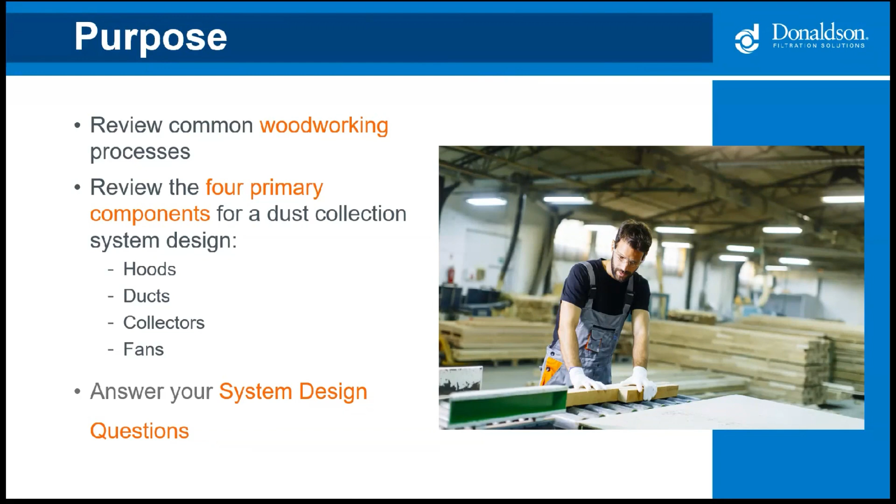We're going to start off today's webinar by reviewing some common woodworking processes where dust collection is usually needed. Then we'll get into the four primary components of dust system design: hoods, ducts, collectors, and fans. We'll finish up at the end with the Q&A session. Please note it can take years of education and experience to become an expert in dust collection system design. The goal of this session is just to give you an overview of the basics.

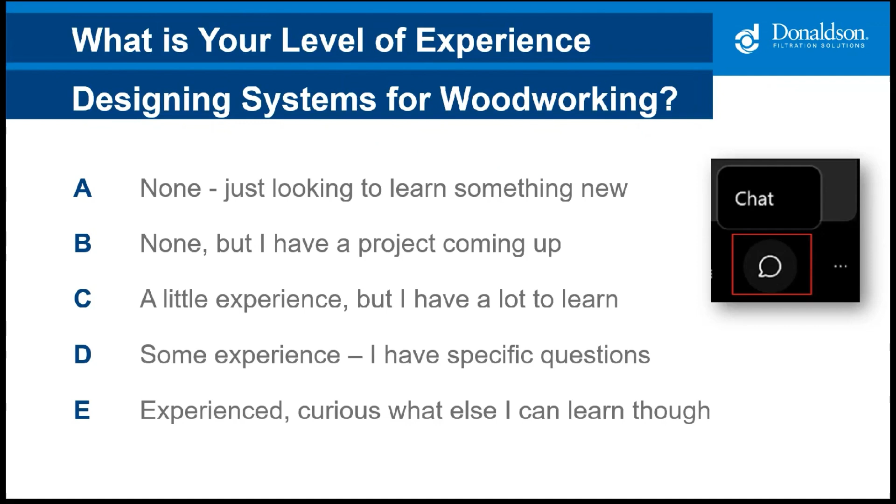Let's talk a little bit about the dust generated during woodworking applications and the processes that create them. There are a lot of important reasons to control dust generated in woodworking, such as improving the overall air quality for the employees, and exposure control. We want to minimize any dust in the breathing zones of the operators and other employees in the area. Hood design can play a big role here.

There are environmental concerns, which frequently fall under EPA standards. Safety concerns, such as NFPA guidelines, and cleanliness of the facility. In some of our larger applications, we have operations that remove over a tractor trailer full of dust in a day. So you can imagine what that would look like if we just let it pile up. And lastly, there is machine functionality and performance to consider.

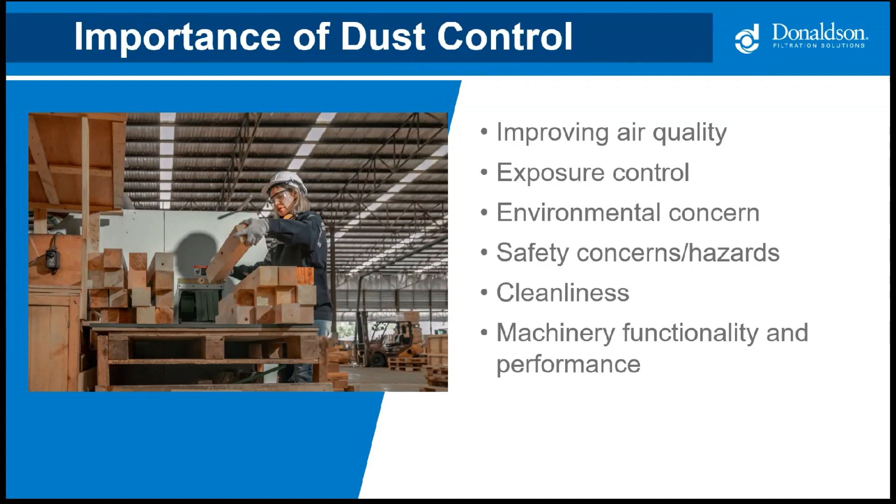There are many different types of woodworking industries, and we typically break these down into two main categories: raw materials and finished products. Raw materials include dimensional lumber and rough mill, engineered wood products such as OSB, plywood, MDF, and so forth, and rough sawmills. Whereas finished products are going to include kitchen cabinets, furniture, millwork, and other finished products.

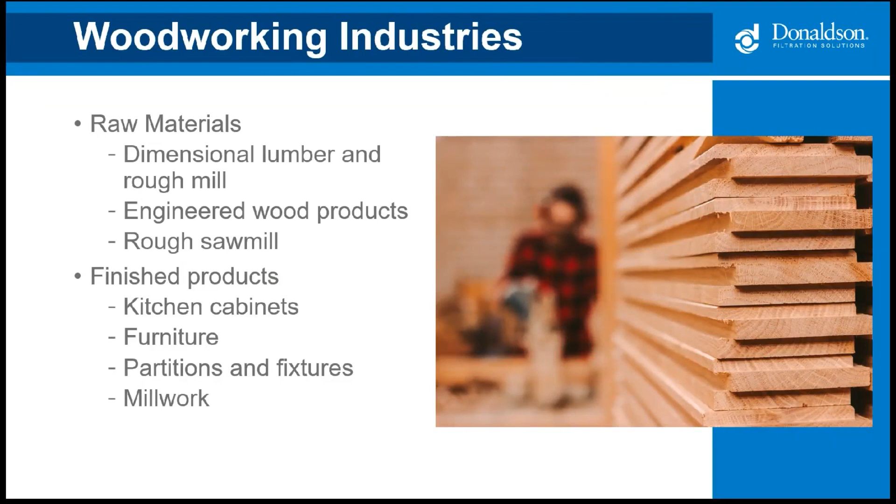The type of raw material is another important consideration in selection and sizing of dust collectors. We break these down into three primary groups: softwoods, hardwoods, and engineered lumber. Softwoods typically have a much higher moisture content, and frequently when working with pine, we would move to a polypropylene bag as an example of something we might do to compensate for the higher moisture.

Hardwoods are used more in finished products like furniture and cabinets, but different species of hardwoods can produce very different dust characteristics, even coming off the same operation. And then there's engineered lumber, which is often used in construction.

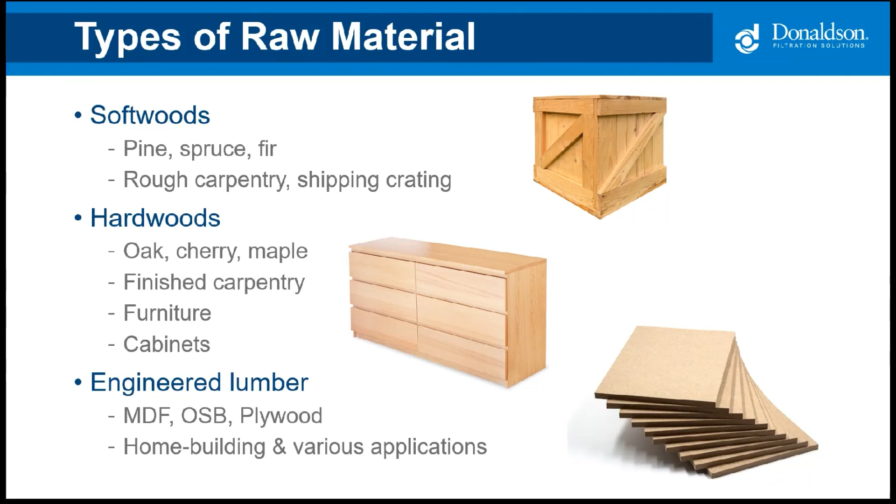All right, the diagram shown here shows several different dust collectors in use. We have our large baghouses shown at the center of the map near the bottom, as well as one outside, near the outside wall in the shop. We see a small cyclone in the upper left corner of the building, and we see an example of an enclosureless collector toward the right-hand side of the map.

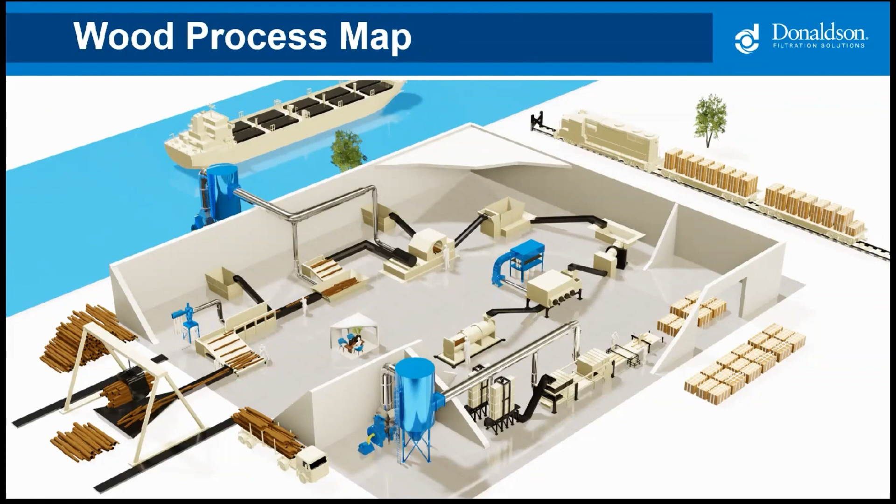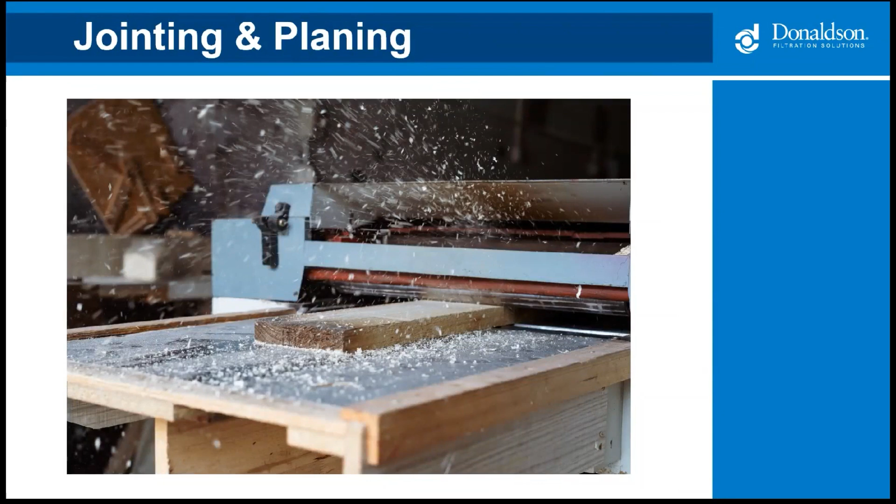Now we'll take a look at some common woodworking processes that utilize dust collection. Jointing is a flattening of one face and one edge as part of a milling process. Planing is used to smooth and remove excess material from wooden surfaces to create a near finished surface. Both of these processes can produce a large volume of dust and much larger particulate.

Most people are quite familiar with sawing and cutting. Now there's many different types of saws. You have circular saws, band saws, table saws, miter saws, and so forth down the line. And many of these saws are hooded in quite different ways.

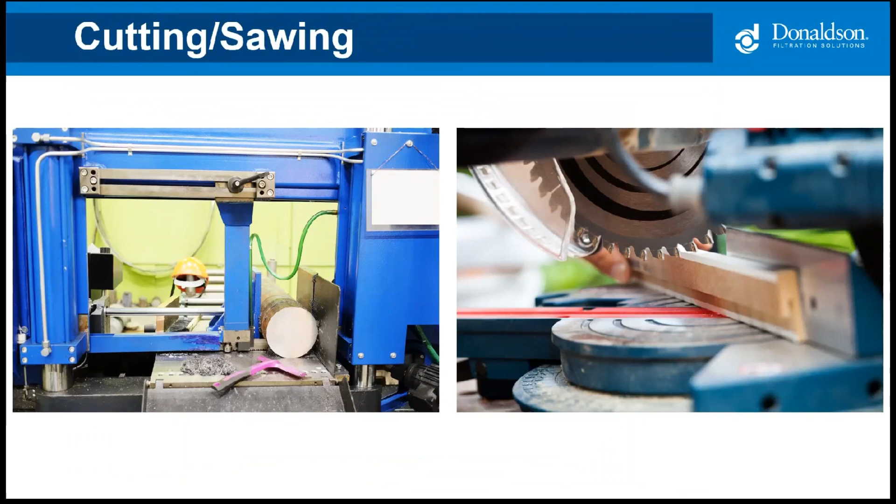Drilling and boring. Drilling is obviously creating a hole in the wood, whereas boring is removing material around a pre-existing hole. Both of these can be challenging for dust collection due to the depth of the hole being produced and the difficulty in getting the suction to the point where it is needed.

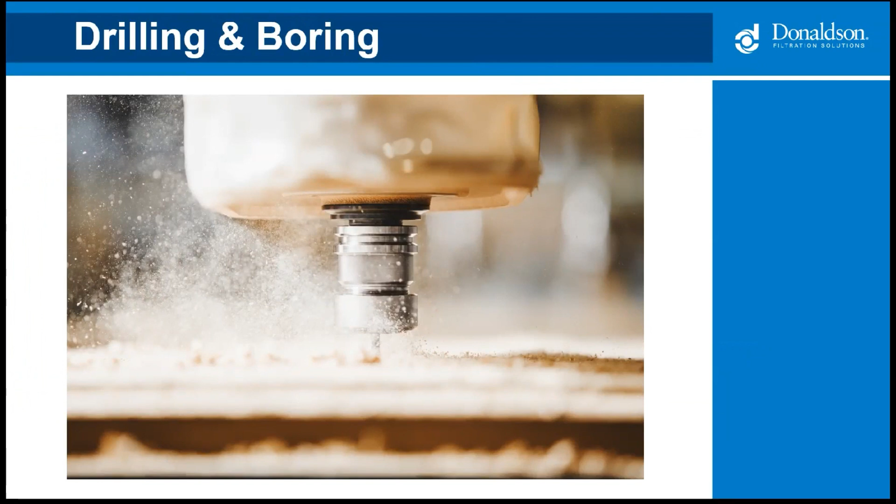Routing, shaping, and molding all involve putting a profile onto a wood component. They can be complicated and automated, or simple like a hand router you might use in your home wood shop. Many of the CNC routers require you to overcome a large amount of static pressure.

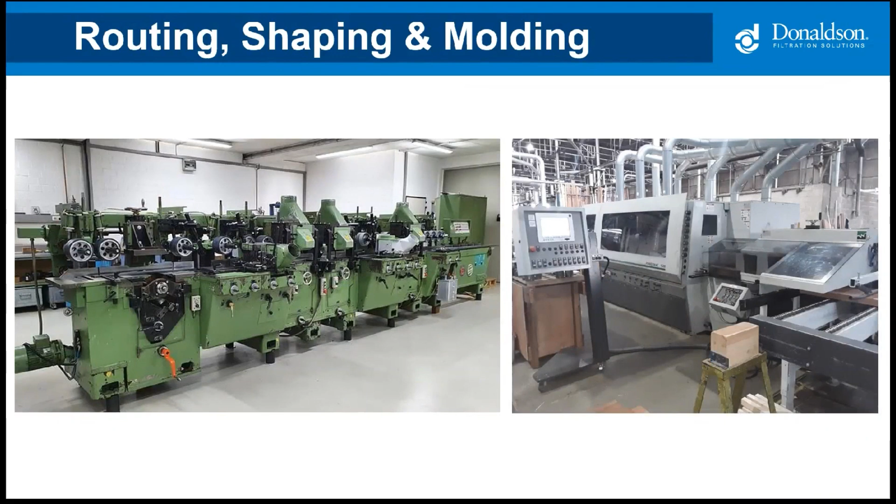Lathe turning is the art of shaping wood into cylindrical shapes, such as chair legs and spindles. One of the fun ones we did involving dust collection on a lathe is at Louisville Slugger, where bats are turned on a lathe. An interesting side note regarding Louisville Slugger is that the bats used to be nearly 100% ash, and they are now mostly all maple. This change in species had an impact on the dust collection system. You get far more curls and strands with the maple than you did with the ash.

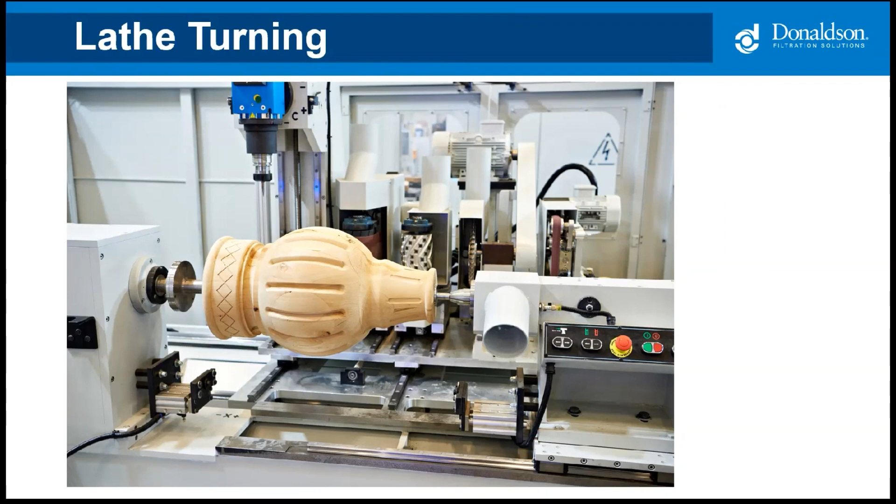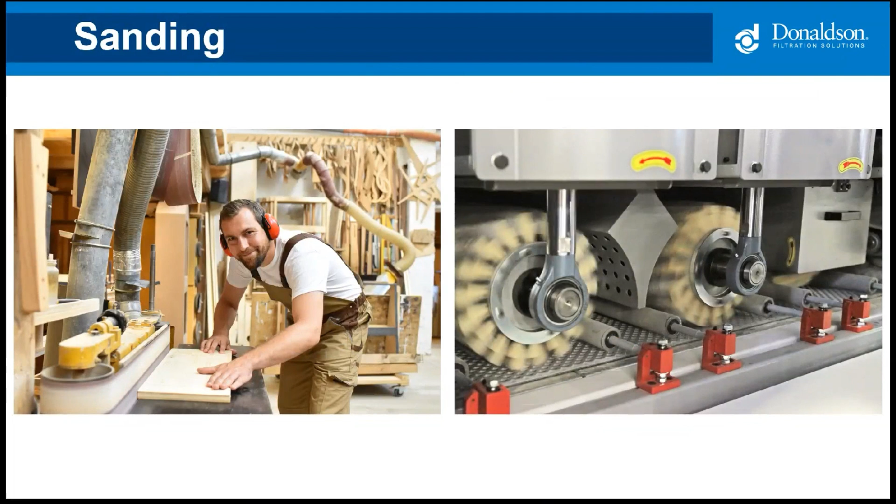Sanding is a process of taking away material to create an ultimate finished component and then adding finishes like stains or paints. The right-hand picture shows a multi-edge sander. The left-hand picture shows a belt sander. It also shows really poor ductwork. A Donaldson designed system would look a lot different, but this is representative of what many shops look like when we first entered them.

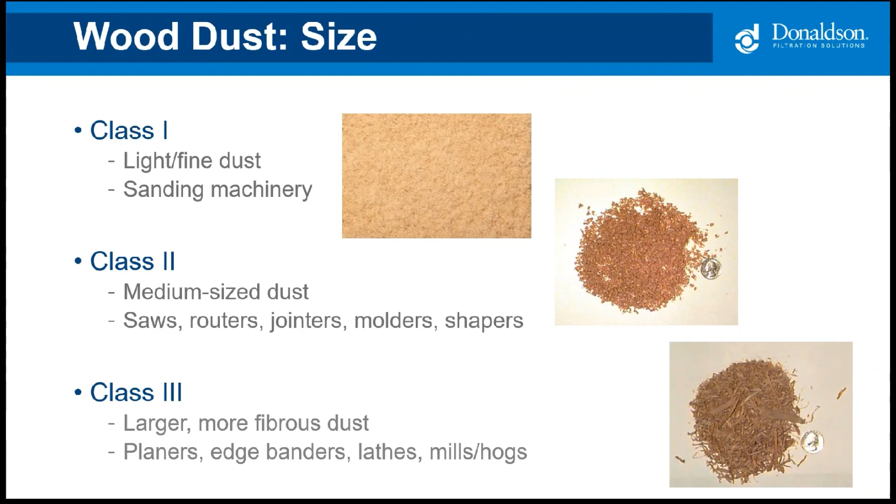As you can see in woodworking, there are many processes and machines that create dust. At Donaldson, we break the dust down into three basic categories based on the dust characteristics. These categories will help in our selection and size and style of filtration device. We define Class 1 as light or fine dust, such as dust generated from sanding. Class 2 is a medium size, such as dust generated from saws, routers, and jointers. And Class 3 would be your larger size dust, such as that generated from planers and lathes.

In addition to the size of the dust generated, there are a few other factors that we take into consideration to help select and size a dust collection system. We already spoke briefly about the different wood species and types. Moisture content can be a very important consideration. Are there glues and resins present that can create a challenge? What type of equipment or process is producing the dust? What are the airflow and static requirements of the machine?

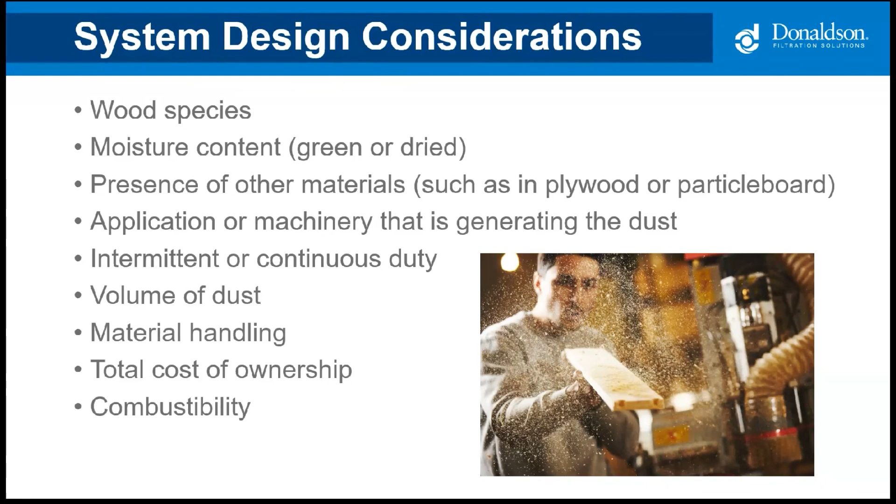Is the process continuous or intermittent? How much dust will we be collecting? A 5-gallon pail or a full tractor trailer? What are we going to do with the collected dust? Will we drop it directly into a drum or bag, or will we convey it to a storage hopper? We want to look at the total cost of ownership, and last but certainly not least, we want to consider combustibility.

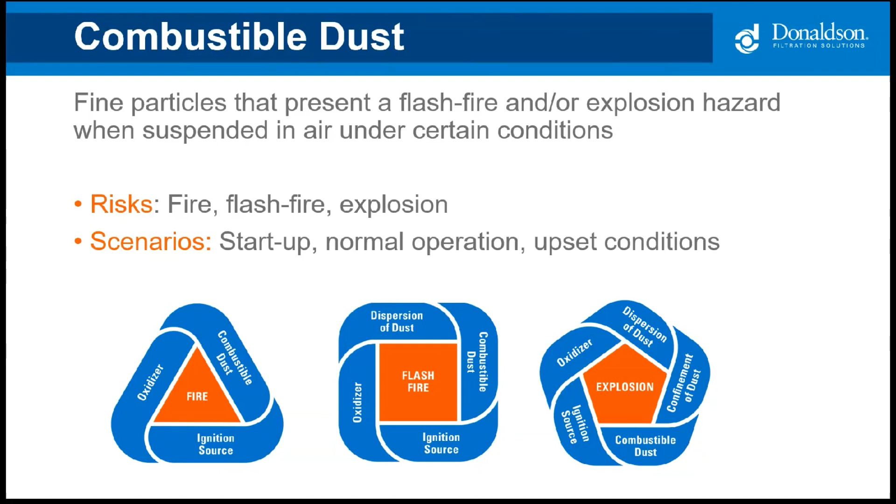When the source of fuel, which in our case is the dust we're collecting, is finely dispersed, it can lead to flash fires. When that dust is then contained within a dust collector enclosure, the conditions are right for a dust explosion. We are going to circle back to this towards the end of the session, but it's a complex and complicated topic. Toby, do you want to start talking about system design?

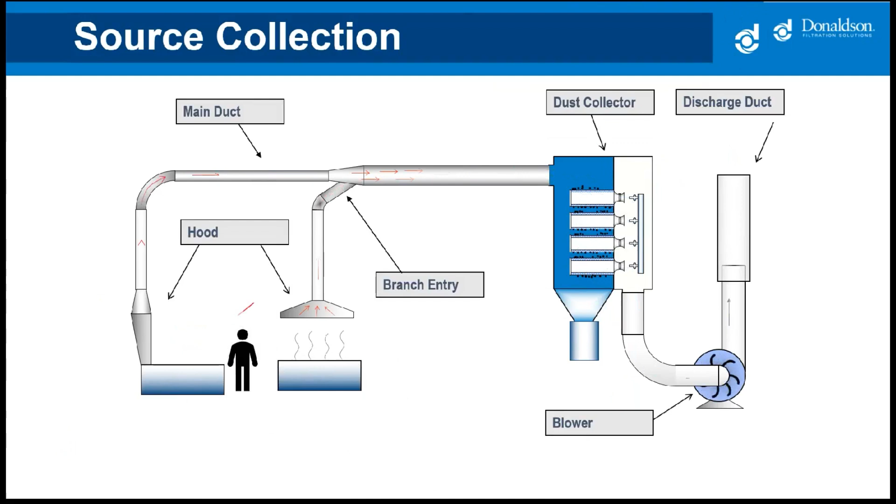Here the contaminant is separated out as clean air passes through the filter media to the fan where it's discharged to the atmosphere. These systems are a sum of individual parts that are designed based on the characteristics of the dust and various application factors. If one component's poorly designed, the whole system's affected.

In system design, we have two main objectives. We want to accurately predict the volume of air in CFM that's required to effectively capture and control contaminants at their point of generation. We also want to predict the total energy and horsepower required to produce those required airflows.

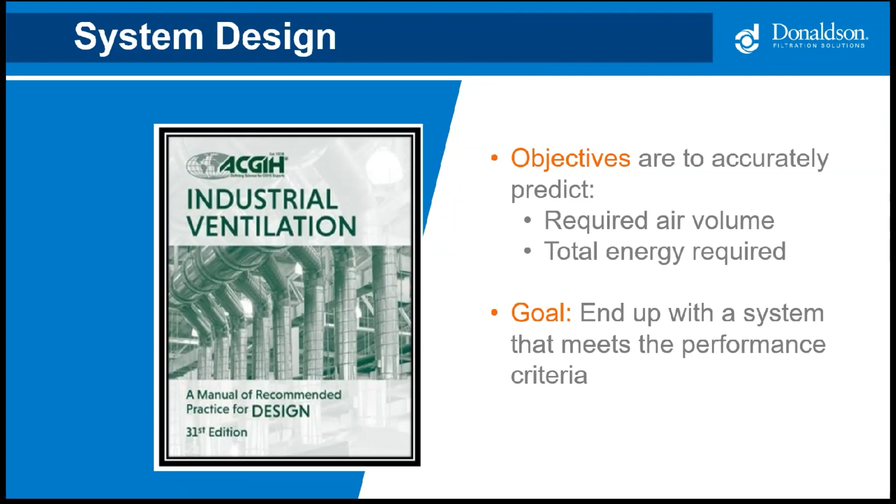They offer multiple courses throughout the year on system design using the VENT guide as a textbook. I've been to the ventilation conference and attended several courses to develop my design expertise. And we also have a few experts here at Donaldson that are instructors at the conference. If you have any interest in developing your system design knowledge, I would highly recommend both of these resources. The ACGIH guidelines are considered by most in the industry, including OSHA, as the standard for proper ventilation design.

There are a lot of different formulas that we use in designing the system. The most basic and widely applied is airflow. We refer to it as Q equals V times A. The Q is the total CFM of air needed. In order to get the Q, we multiply the velocity of air, which is the V, by the area of the hood or the duct that the air is flowing through.

The formula is one of the basic building blocks in designing dust collection systems. We start with the pickup points and calculate using the formula to get the required airflow at each pickup. This will give us the total CFM needed for the system. This formula is also used when we're calculating the required velocity within the duct. So throughout the design of the system, we'll refer to Q equals V times A over and over.

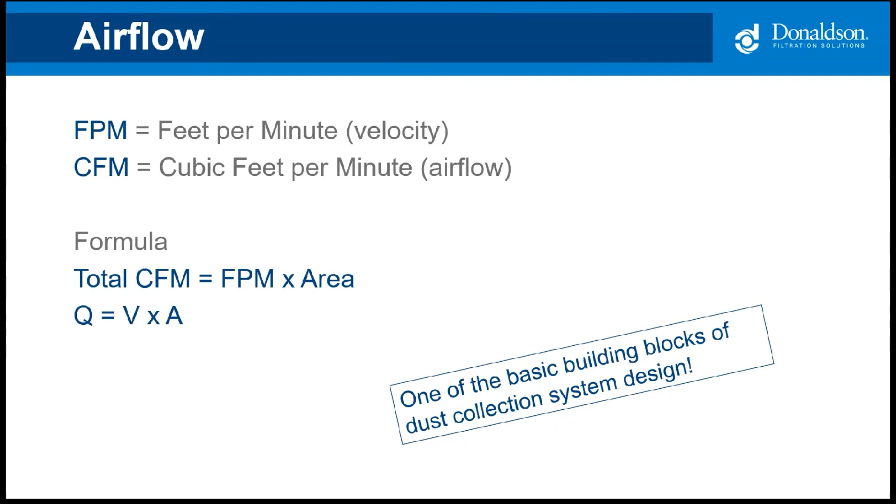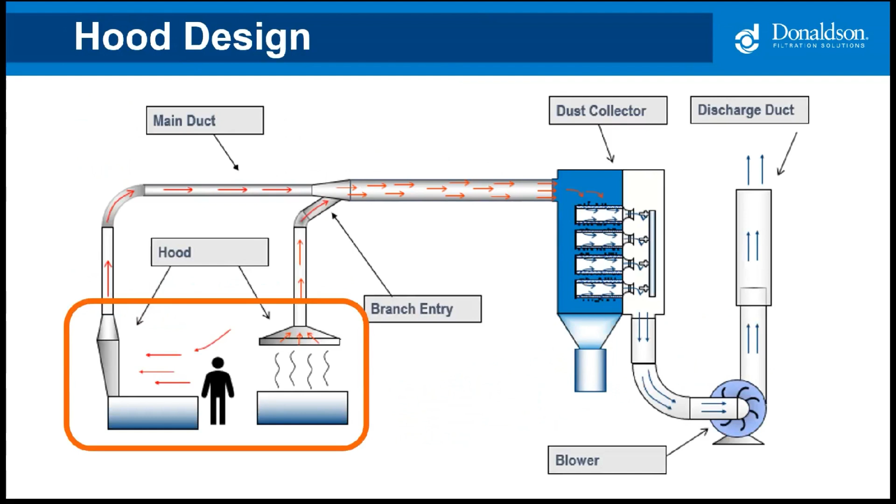The first component that we'll talk about is the hood. This is a critical component for system design that will allow the containment and collection of the dust. A well-designed hood is going to minimize the amount of airflow that's required to effectively capture and control the contaminant where it's released, while minimizing the energy required to do that.

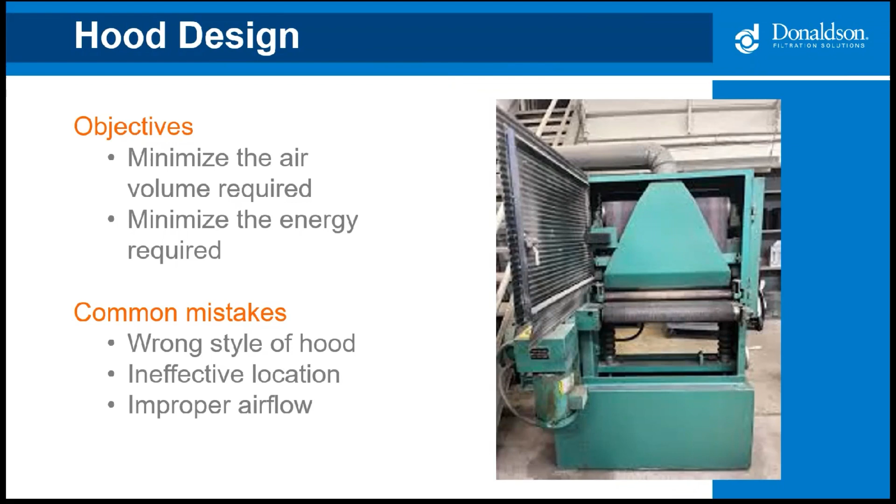When it comes to assessing existing systems, a few common mistakes we see are the wrong hood style being used, the hood's not located in an effective position, or you have inadequate airflow at the hood. You can see in this picture, the manufacturer provided a hood the full length of the sanding belt, which is great. However, the 90-degree elbow immediately above the hood that you can see in the photo is not ideal.

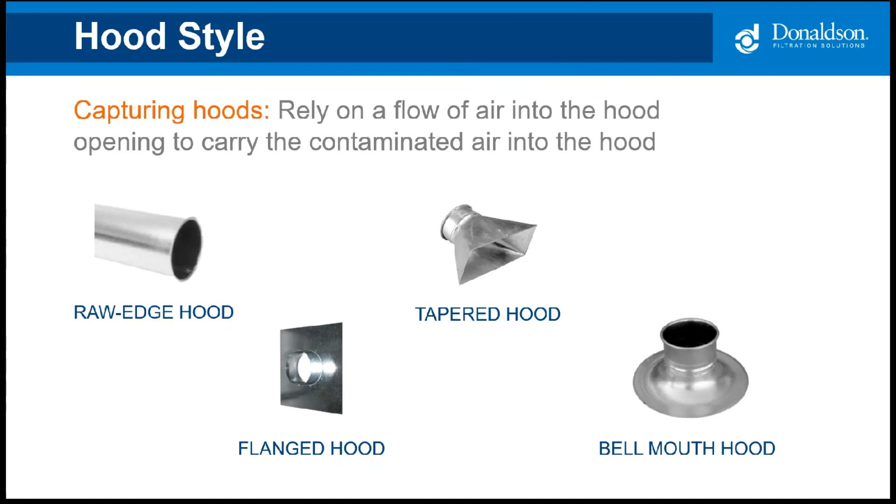So regardless of the hood style, to be an effective hood, it must be positioned properly relative to the point where the contaminant is emitted. Remember, the first objective in hood design is to minimize the air volume required to maintain capture efficiency. To minimize air volume, the hood must be close to the capture point without disrupting the process. Hoods simply just can't reach out and control contaminants far from the inlet.

So think about your vacuum at home. To pick up debris from the floor, the vacuum head must be close to the contaminant or it just doesn't have any effect. The hood positioned twice the distance from a contaminant emission point rather than at the capture point will need to draw approximately 4 times more air to produce the same capture efficiency. So more air means larger equipment, larger ducts, a larger fan with higher horsepower, all of which add increased capital and operational costs.

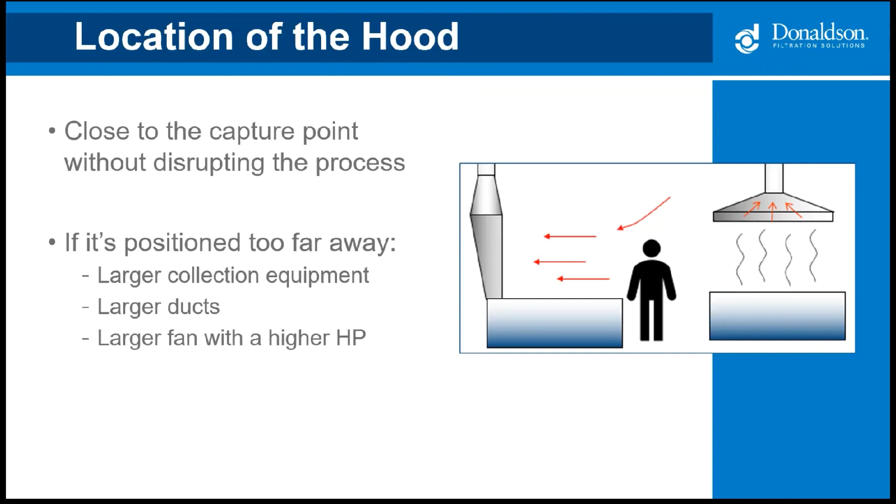When determining airflow at the hood, the main design factor is called capture velocity, the velocity required at the point where contaminant is generated to gain control of the contaminant and direct it into the hood. For wood dust, capture velocity is typically between 150 to 750 feet per minute, or FPM as we refer to it, although it's going to depend on the application and the style of the hood that you're going to use. So when you're designing hoods, we want to avoid airflow extremes.

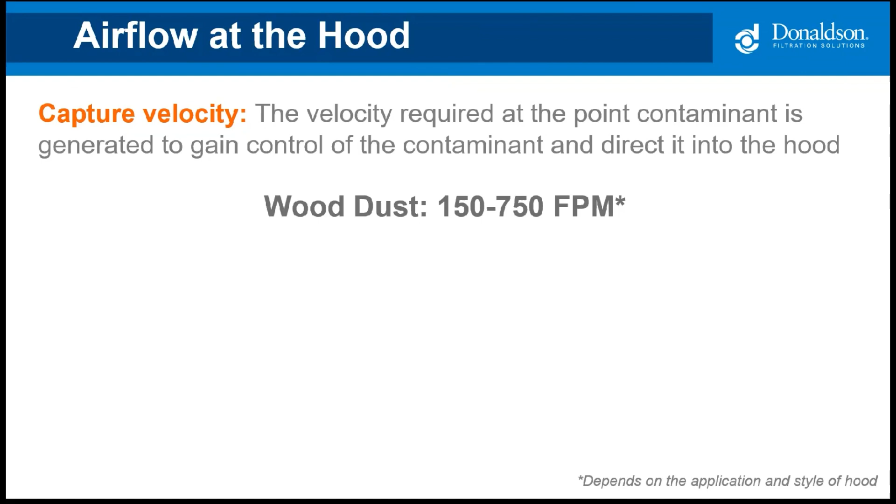Too much airflow at the hood or pickup point may mean you're picking up good product rather than just nuisance dust. It also can increase your risk of capturing unwanted particulate like sparks or embers. And since more energy is required to move more airflow, it could lead to higher than expected operational cost. Insufficient airflow at the hood could require additional housekeeping measures to be implemented. Depending on the dust, it may lead to increased risk of exposure.

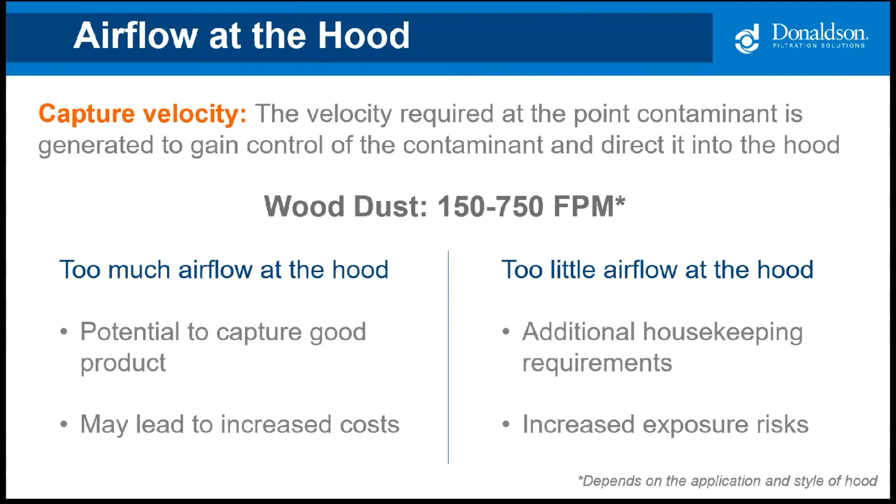Once we design the proper hood to capture the contaminant, the goal is to move the particulate to the filtration system through a series of ducts.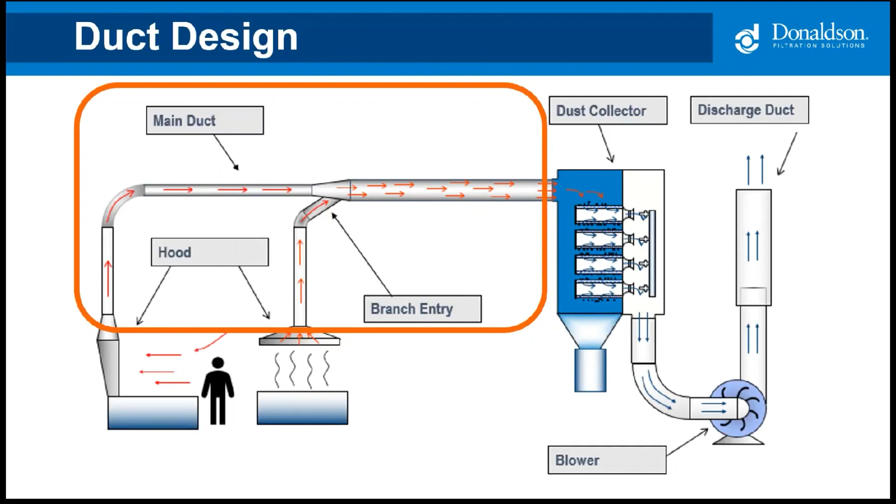A properly designed duct system should pull the minimum airflow required at each hood, as well as maintain velocities required to transport material through the duct into the collector. And you have to be able to do this utilizing the least amount of energy possible, minimizing any wear and tear on the duct components. So a few common mistakes that we see when it comes to duct design: incorrect ducting being used, incorrect duct size or fittings being used, and the duct system just not balanced correctly.

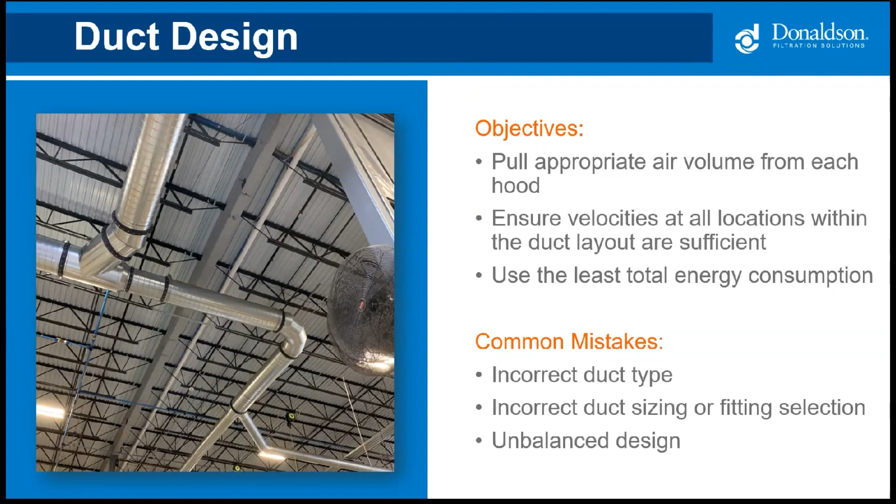The minimum duct velocity is a critical design factor. The lowest velocity where all contaminant will remain suspended in the airstream is what we refer to as duct velocity. If you go below this velocity, dust could settle out within the ducts and cause other safety issues. Ductwork, no matter the size, must be full of air at the design conveying velocity to avoid any settling out. Here you can see a list of different types of dust and their recommended transport velocities on the slide.

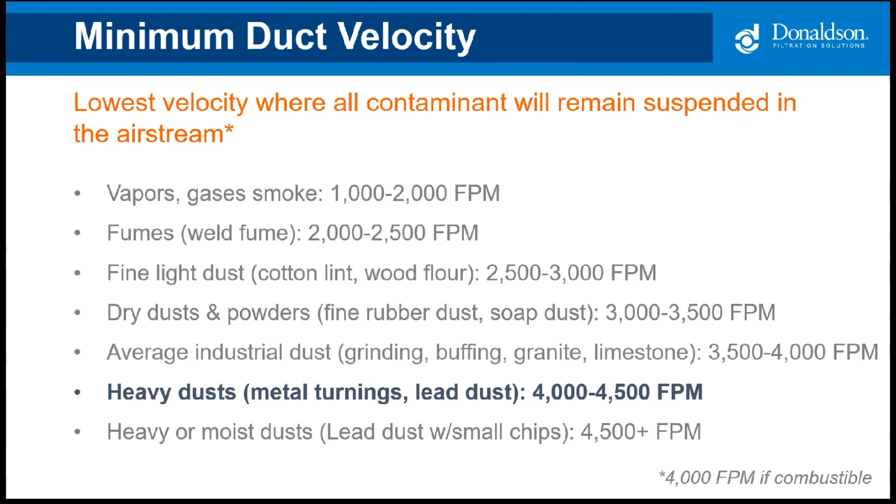For many of the light dusts generated in woodworking, like sanding, the Industrial Ventilation manual lists the minimum velocity as 2,500 to 3,000 feet per minute. However, 4,000 feet per minute duct velocity is for combustible dust, which is typically what will be in woodworking. So you're going to see duct velocities in that 4,000 to 4,500 feet per minute range. If the duct velocity is too high, it's going to require more energy to move the air through the duct. That ultimately can impact the size of the system, as well as create issues such as noise, abrasion, and wear and tear on the duct and other equipment.

A few pieces of advice when it comes to duct type. Rectangular duct is commonly used in HVAC applications where you're going to be moving air only. We don't want to use that in industrial applications because dust settles out in the corners. It's okay to use it on the clean air side though. When specifying industrial duct systems, make sure you call out round, heavy-duty industrial ductwork. Most dust collection applications will use class 2, 3, or 4 ductwork, which are designed to SMACNA standards. Typically, the higher the duct class rating of the ductwork, the higher the gauge.

Spiral duct tends to leak air. It can impact your design airflow by about 10%. And if it's used outside, it also could provide a prime source for water to enter the ductwork and get into your dust collection system. So spiral duct is generally not recommended.

Flexible duct's popular because it allows operators to move the hood locations to fit their process. However, that comes at a price because there isn't a smooth inner surface inside the duct. When the air moves through it, it creates a ton of turbulence and therefore requires significantly more energy than traditional hard ducting. So if you're going to use flexible ducting, we recommend minimizing that as much as possible.

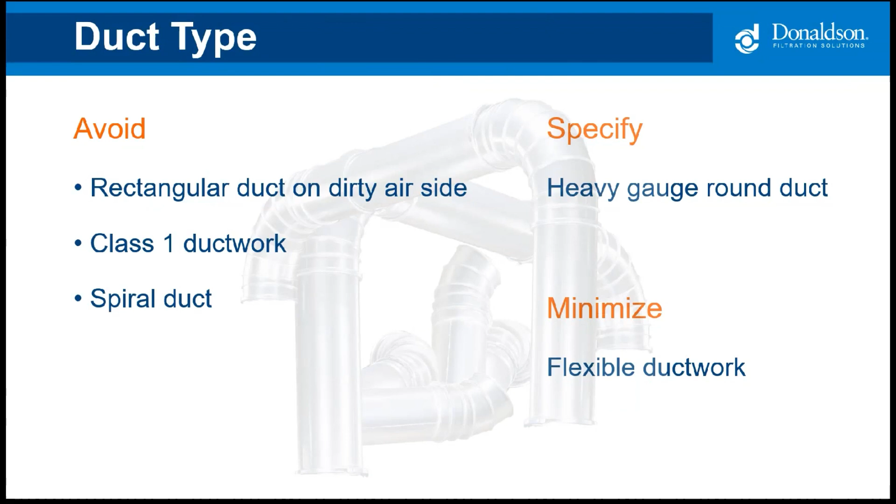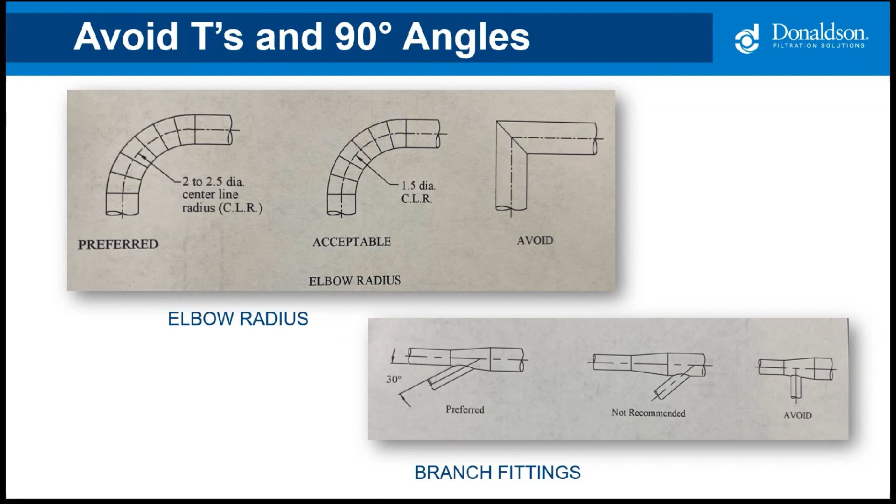I mentioned earlier that having an unbalanced system is something that can go wrong with the duct design. When customers add new equipment to an existing system, they often don't consider the impact it has on other existing equipment. So in most cases, existing systems aren't modified to accommodate the additional airflow or static, and it becomes unbalanced. Luckily, if you know the customer is going to be expanding the process, there's a few ways to design future lines into the system so they don't have to sacrifice the performance.

Having a balanced system is one of the most important aspects to an effective dust collection system. It ensures you're pulling the correct amount of air from each hood. A lot of issues have been created in existing systems where the process owner goes and adds additional pickup points and doesn't account for the ramifications downstream. So give us a thumbs up if you've ever seen this in your experience. You design a system, you find out later the process owner changed something.

It looks like we're seeing a bunch of both thumbs up and thumbs down, so people are certainly running into this scenario. Chloe? Sure, I see this quite often. What about you, Jason? All the time. Yeah. Most of the time, these additions were not planned and the system can become unbalanced.

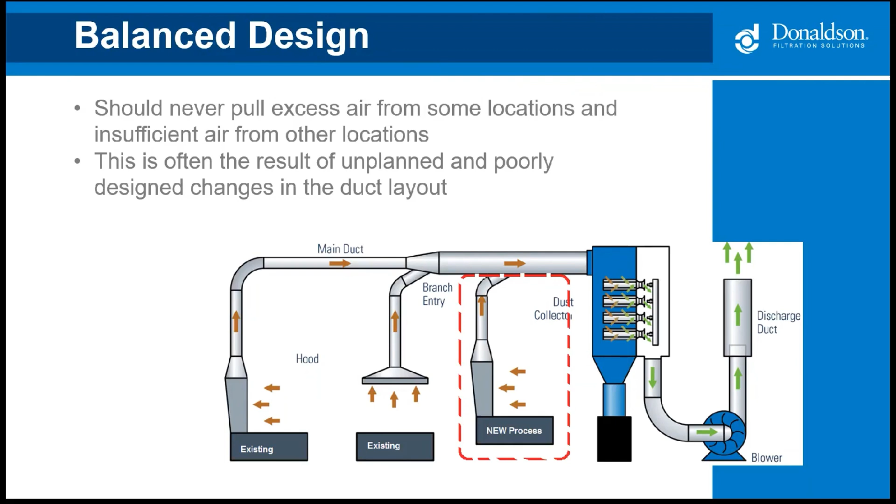If you know a customer is going to be expanding their process, there are ways to design future lines into a system so they don't have to sacrifice performance. But if a customer needs to add a line to an existing system, call in a professional to help. Don't just do it and expect the system to work.

Our next system component is the dust collector itself. The main objective of a dust collector is to filter or remove the dust from the airstream and discharge the collected dust into a container or takeaway system. The objective is to do this as efficiently and economically as possible while operating in a stable and predictable fashion.

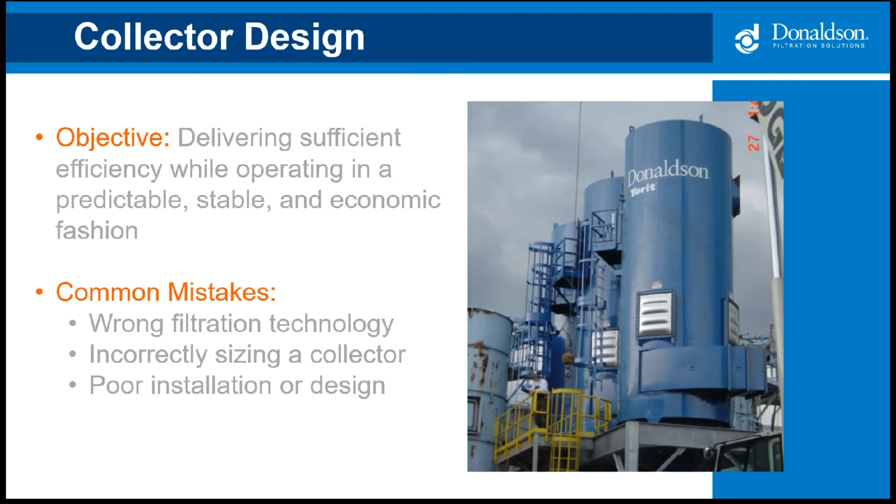The most common mistakes that we see when it comes to collector design are the wrong filtration technology, like using a cartridge when a baghouse would be more effective, incorrect sizing of a collector, either too aggressive or too conservative, or poor installation or system design, such as poor duct design or inlet orientations. The photo here shows a series of 3 of our RF collectors sitting on a common platform.

Over my career, I've used many different dust collector types on woodworking applications. When applied to the appropriate operation, they can all be successful, but put the wrong collector on the wrong application and you can quickly get in trouble. Cartridge collectors, cyclones, and enclosureless collectors all have their place, but baghouses are the most common collectors used in woodworking.

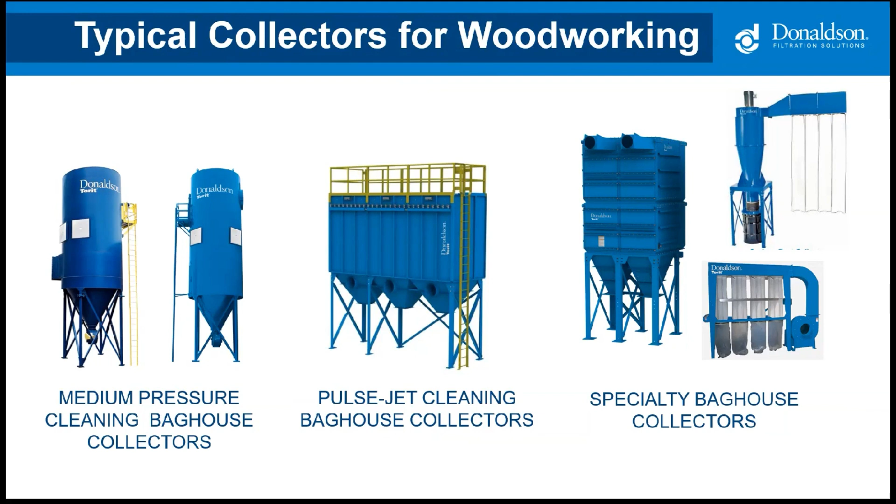Our baghouses are broken down into 3 different cleaning types: low pressure cleaning, medium pressure cleaning, and high pressure cleaning. The high pressure cleaning would be a compressed air system that reverse pulse jets the unit. Enclosureless collectors are limited to no more than 5,000 CFM by NFPA.

The RF collector is a workhorse in the woodworking industry. It can handle large air volumes and large volumes of dust. It has a cyclonic inlet that provides some pre-separation prior to reaching the filters. The bags are cleaned with a medium pressure produced by a positive displacement blower, thus saving you on expensive compressed air. The RF also has a single inlet, single outlet, and single dust discharge point.

The RF helps with a quick and easy installation due to the fully welded construction. Units are usually lifted off the truck with a crane and set into place. The photo here shows an RF collector. The fan is mounted on the left side of the collector and is connected with the large galvanized duct. You can also see a pulse jet bag house in the background.

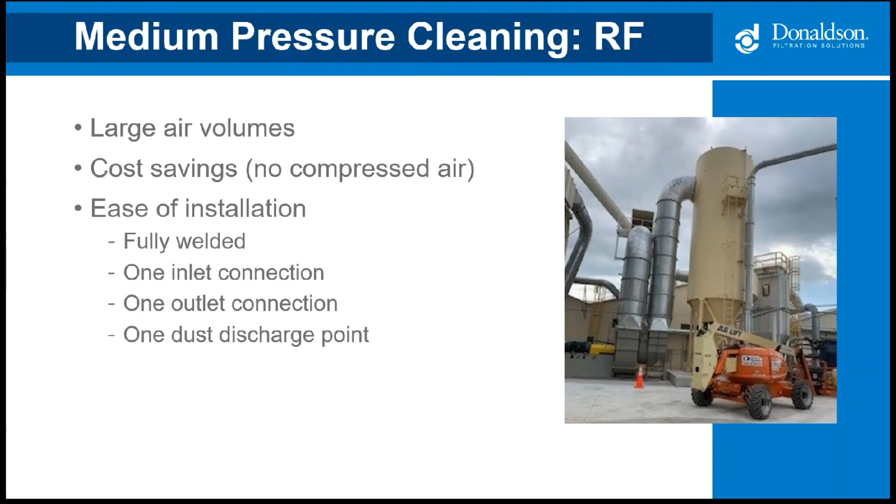The RP collector is very similar to the RF and has a lot of the same features, but the RP uses pleated filter bags rather than the fabric bags over cages. The pleated bags are shorter than fabric bags and they have more square footage of media per filter. The pleated bags can work very well in applications where a high percentage of the dust is sanding fines and applications where there are concerns about interstitial velocity.

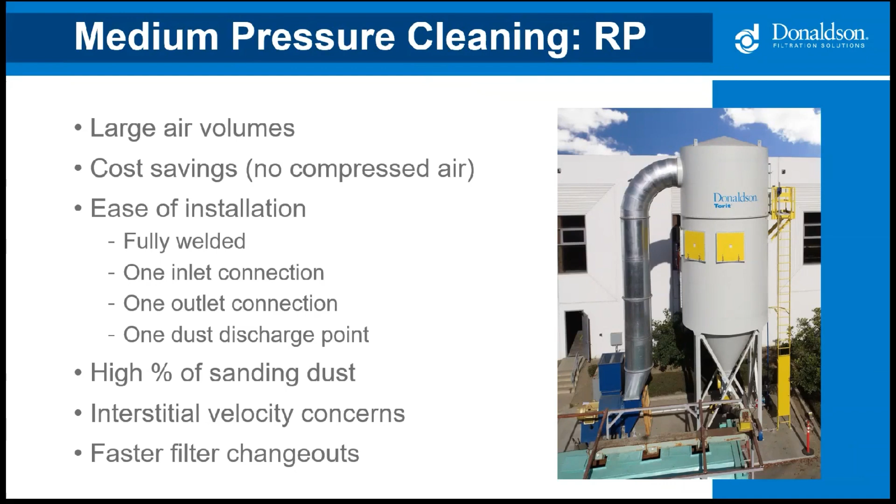The picture here shows a modular bag house. The modular bag house has a high pressure cleaning system or pulse jet cleaning system that fires compressed air back through the filters to clean them. The MB comes in square and rectangular configurations and is typically used for low and medium volume applications. Pulse jet bag houses can take up a good bit of real estate, and they can also have multiple inlets, outlets, and dust discharge points. They do, however, typically have lower capital costs than other bag houses.

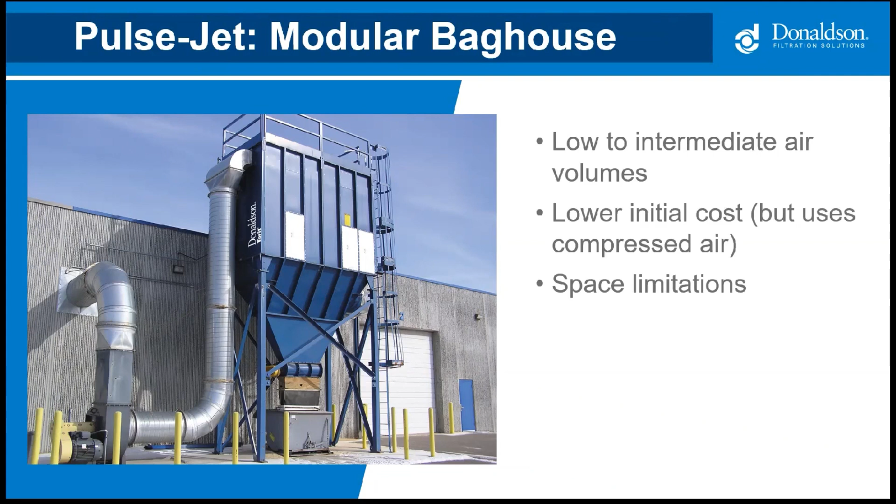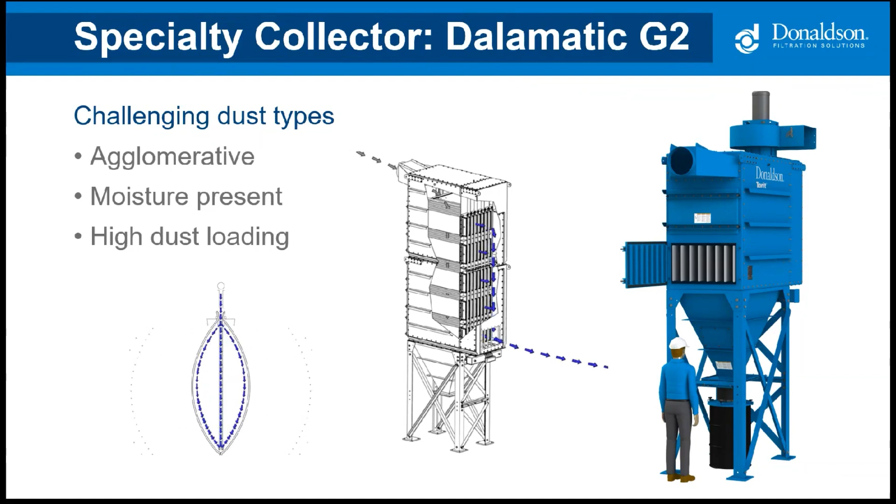Sometimes a traditional bag house isn't going to be the best option, and we need to use a specialty collector. The Dalamatic G2 is a great selection if we are dealing with agglomerative or sticky dust. These collectors have envelope-shaped bags that have a tremendous snapping action during pulsing, shown in the graphic on the left. The snapping action aids in dislodging the dust cake. The Dalamatic also has a downward airflow pattern, which helps with getting light fine dust down into the hopper and out of the collector. It is a pulse jet collector, so it will use plant compressed air.

Baghouse collectors use bag filters. The two main types are fabric and pleated. Fabric bags are installed over metal cages. During filter changeout, the entire bag and cage are removed from the collector. The used fabric bag is removed from the cage and a new bag installed in its place. Then the cage with the new bag is put back into the collector. Many bag houses can have several hundred bags, so the process can be very time-consuming and dirty.

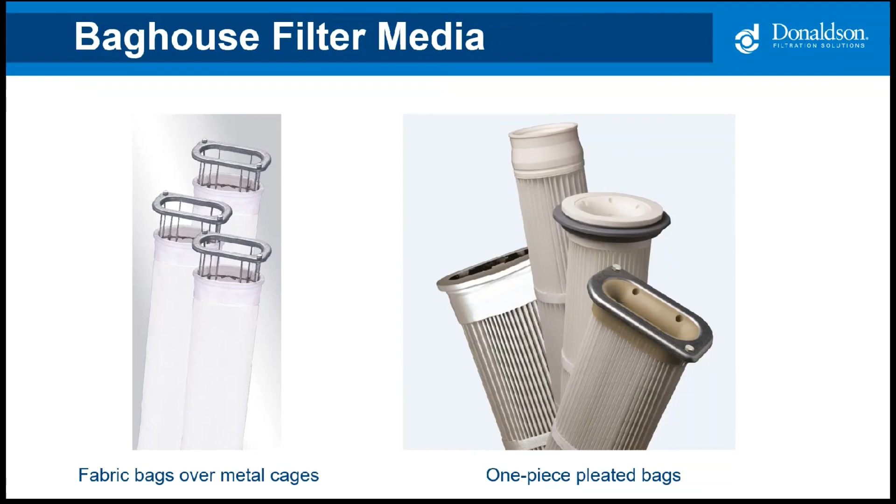Pleated bags are a one-piece design. They tend to be shorter in length and take significantly less time to change out. Not all bag houses can use pleated bags, but they are a great option for certain applications. When I'm designing a system, the very last thing that we do after completing all the static and airflow calculations is select and size the fan. Toby, do you want to talk about fan design?

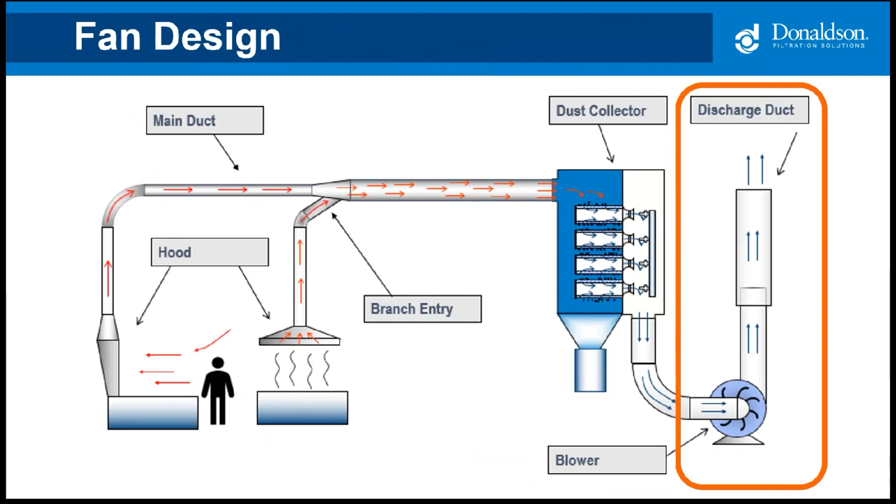Absolutely. The fan is like the heart of a dust collection system. So it has two job responsibilities. First, a fan must deliver the necessary volumetric flow at the required static pressure to drive the operation of the system. And since many dust collectors operate with dirty and clean filters, the required airflow often has to be maintained over a range of static pressures. Secondly, the fan you select should be able to deliver the desired static and airflow with an acceptable energy efficiency at an acceptable sound level.

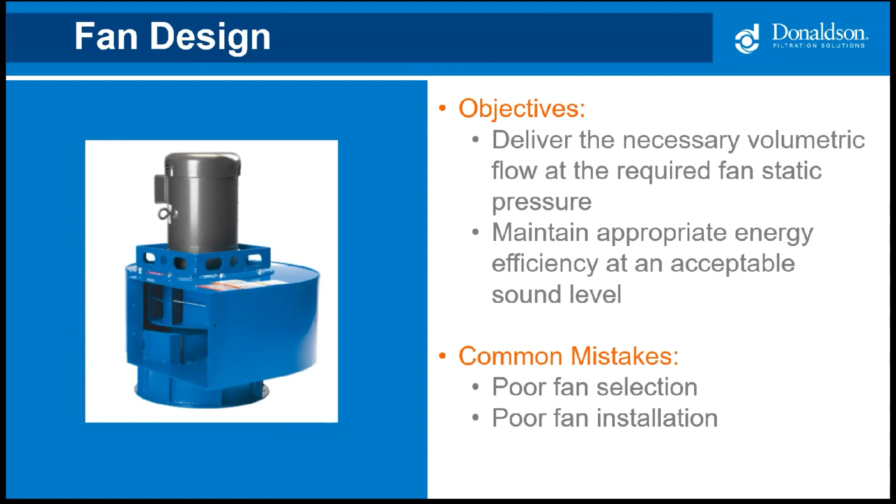So, for example, non-material handling fans located on the clean side of a collector are more efficient than a material handling fan on the dirty side of the collector. Fan challenges generally fall into two categories: a poor fan selection or a poor fan installation.

A critical component of fan design is static pressure. It's basically resistance that the airflow must overcome due to system components. It's expressed in inches of water gauge. When we design a system, we calculate the total static pressure so that we can size the fan appropriately. Here's an example from a recent system that I designed. We had hoods that totaled 1.5 inches of water gauge. The ductwork, including straight runs of duct, elbows, branch entries, all totaled 3.5 inches. The filters in the collector, when dirty, totaled 6 inches. So the total system static pressure for this particular project was around 11 inches.

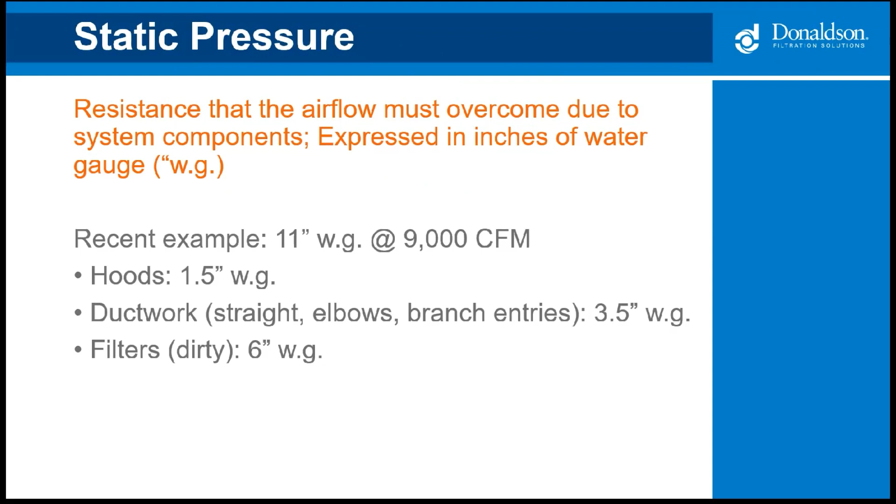Fans are sized based on a system's total static pressure and the required airflow. So let's say I need to size the fan for the example I just gave you: 11 inches of water gauge and the airflow is 9,000 CFM. We use the system static pressure of 11 inches, then line it up with the airflow of 9,000 CFM.

Then we line those factors up and we land in between a Torit backward inclined, or TBI 25, and TBI 30. So we go to the curve to the right where we land, since it's rare we land right on the curve. So in this case, I would have selected a TBI 30.

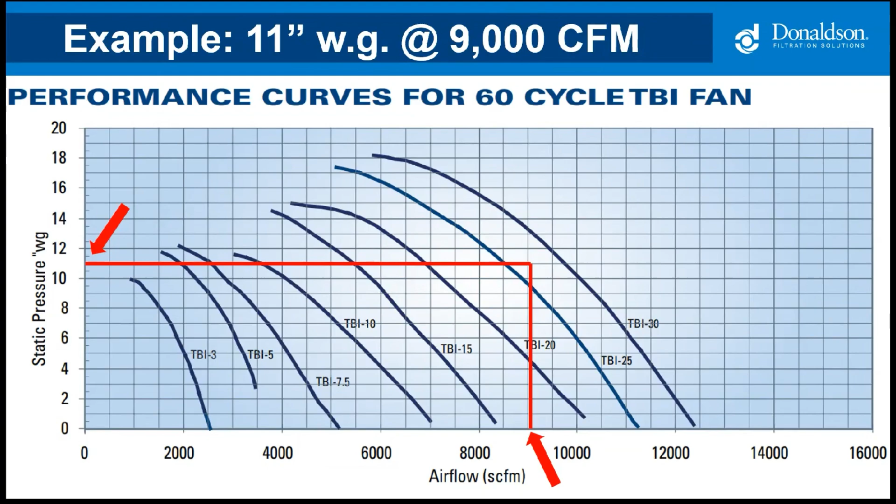To finish things up, and then we'll open up for some questions, there are a few other design considerations that we want to think about. Total cost of ownership. So some things to consider would be how much energy is required to operate it, where's the unit coming from, how easy is it to get parts, how long do the filters last, how easy is it to change out filters or maintain the system, and what is the life expectancy of the system.

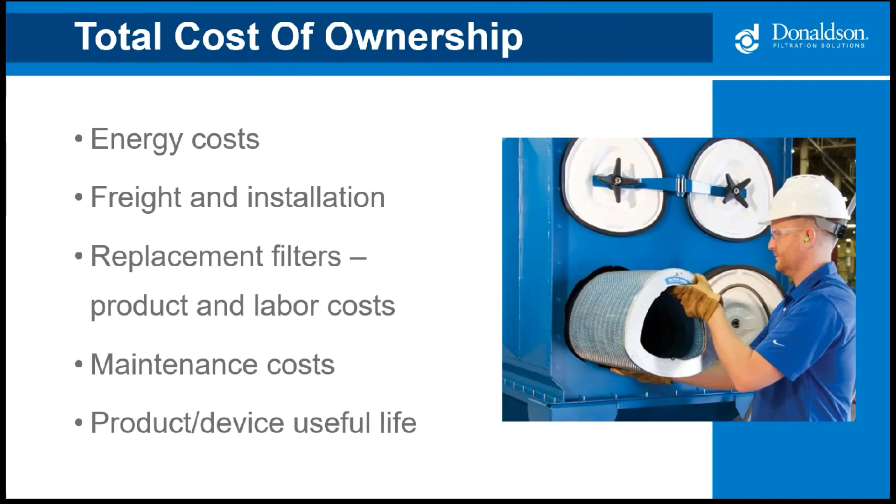Another consideration I want to mention is how technology is being used to monitor dust collection systems. So we have smart technology all around us these days, from our TVs to our toasters. Donaldson's developed a device called iCue to make dust collectors smart. This device gathers important process data in real time, creates automated alerts, has historical reports, and it's available to customers at no charge. It's a great way for process owners to manage and track regulatory compliance information and troubleshoot dust collection issues more efficiently.

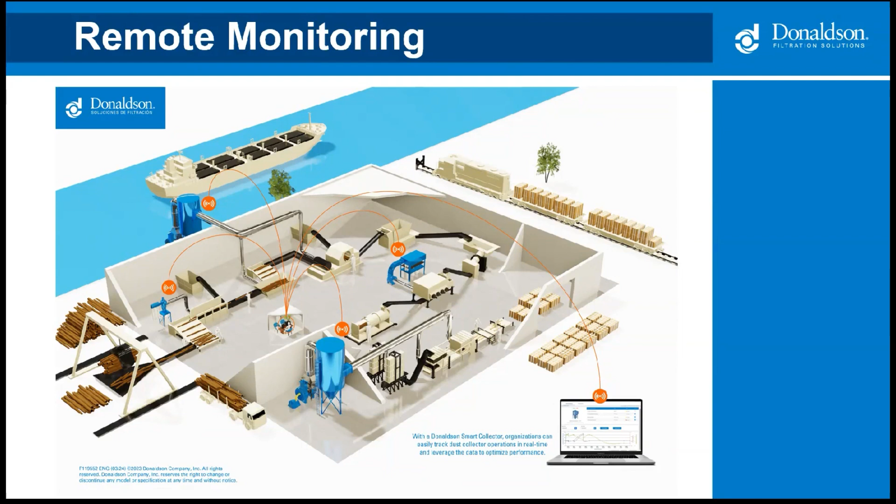And regulatory considerations, everyone's favorite, right? Each of these agencies must have design expectations to reduce process-related hazards, and as we all know, they aren't always consistent with each other. Knowing the hazards related to the process the system is designed to handle will allow you and the customer to make some critical design decisions up front in the process. It can be very expensive and time consuming to change the design once the equipment is installed and in operation, so you want to try and be out in front of it as much as you can.

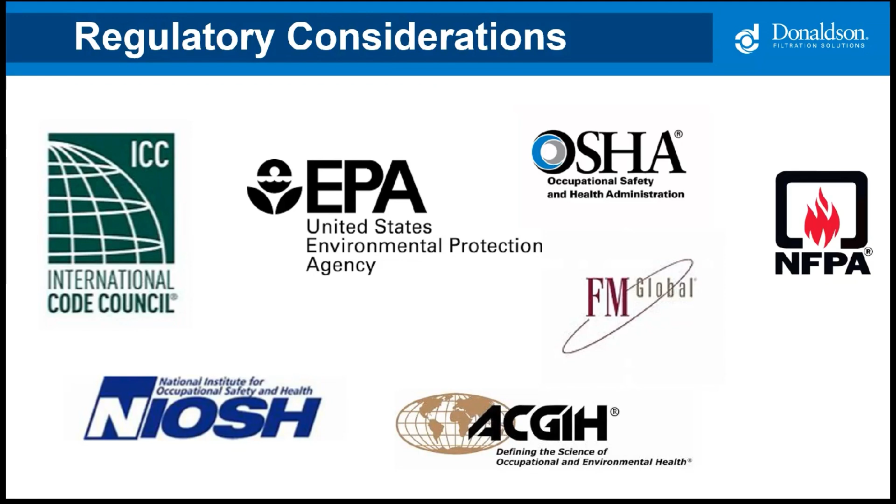I want to talk briefly about the National Fire Protection Association, or the NFPA. It's a global self-funded nonprofit organization devoted to eliminating death, injury, property, and economic loss due to fire, electrical, and related hazards. Standards developed by the NFPA are called consensus standards because they're widely recognized by authorities. NFPA standards are referenced in national and international fire and mechanical codes, and they are adopted by many states. The local building inspectors and fire marshals may be required to enforce NFPA standards.

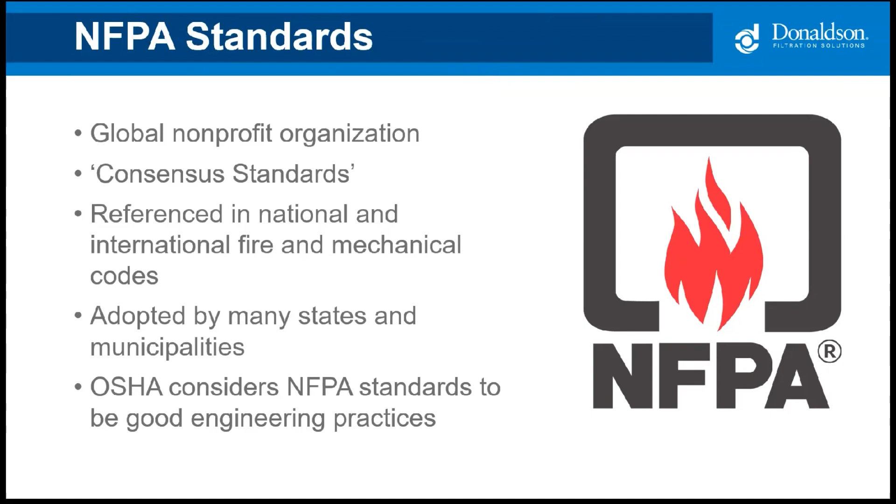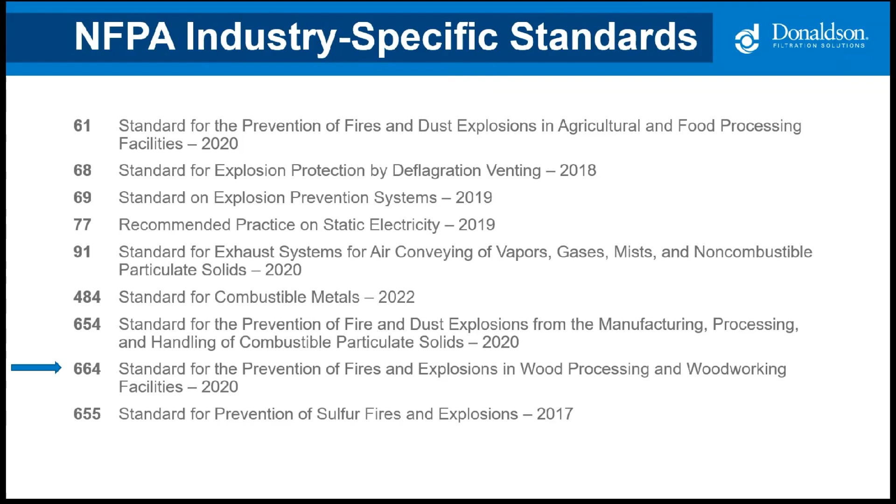OSHA also considers NFPA standards to be good engineering practices, and during general safety inspections may reference NFPA standards when issuing fines to a facility under the general duty clause. Here's a list of the current industry-specific NFPA standards. NFPA 664 provides information to help identify and manage fire, flash fire, and explosion hazards associated with combustible dust and particulate solids found in wood and wood processing industries. Specifically, it addresses the prevention and protection requirements for industrial, commercial, and institutional facilities that process wood or manufacture wood products.

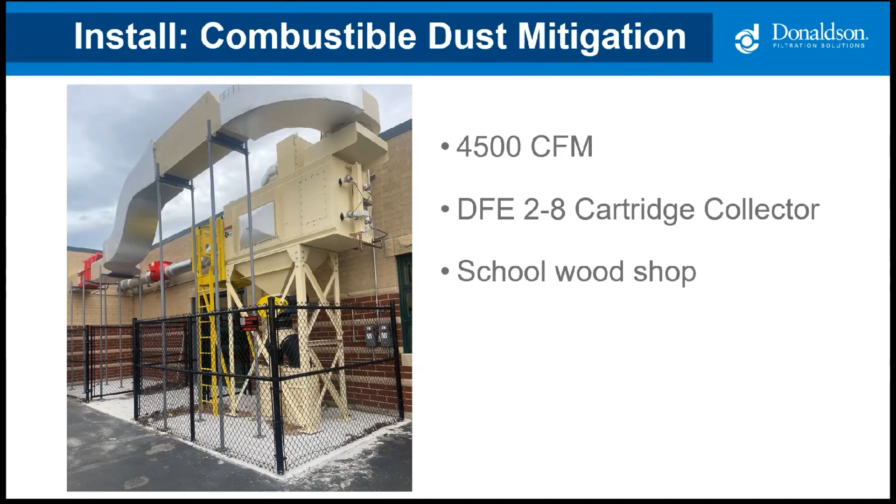For those of you that are new to dust collection, just know that combustible dust is important, complicated, and ever-changing. If you have any questions, please reach out. We have combustible dust experts on our team that can help, and that goes for the entire system, not just combustible dust mitigation.